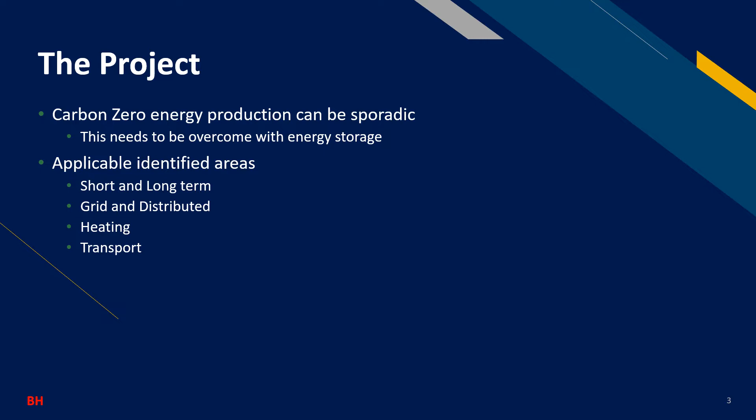In order to break the problem down, we identified key areas where storage can be applied and integrated to meet with the current and future demands of the grid. These areas are the following: short-term for power supplies of typically less than a day, and long-term storage that can supply a lower output over multiple days. These can be implemented at either the grid level or on a more local distributed level, such as a scale as small as per household or up to town and city scale.

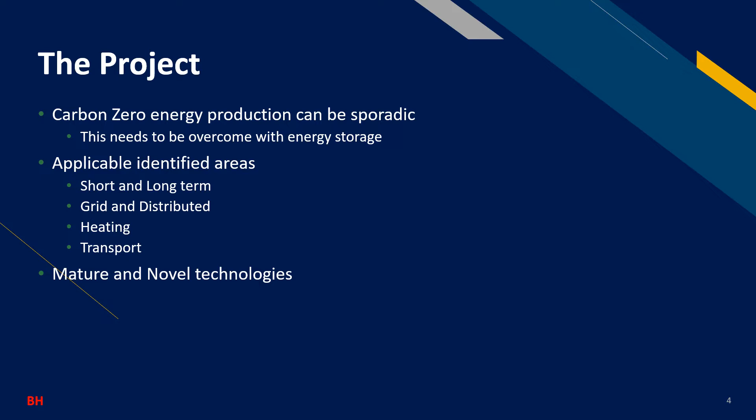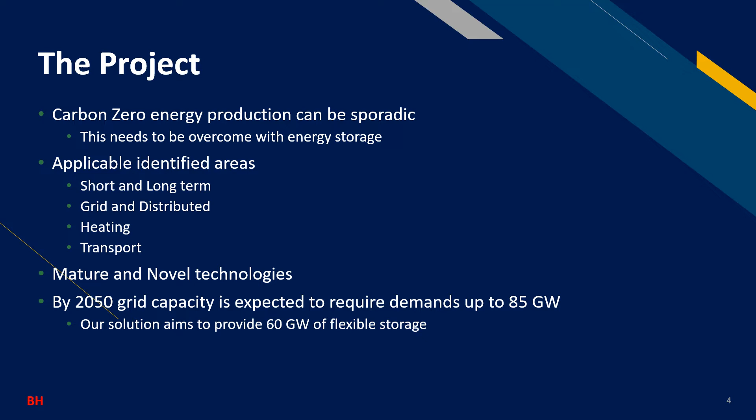Heating is also another area that needs to be looked at due to its potentially high power demands as further electrification is implemented. And finally, the transport sector, where both commercial and personal use vehicles will need to be considered. Each of these areas could have a single technology that provides the best solution, whereas others could have multiple that are applicable. Mature and novel technologies were identified, and then research was started, with a focus on mature solutions that could be commercially viable within the next 5 to 10 year period. Our storage solution is required to work with a potential of 85 gigawatts of demand based on future estimates.

The technologies looked at can be split into two categories. The first, utility, covers the background areas that would dictate our specifications. This includes things such as logistics and sources for both the electrical grid and pipelines for gas distribution.

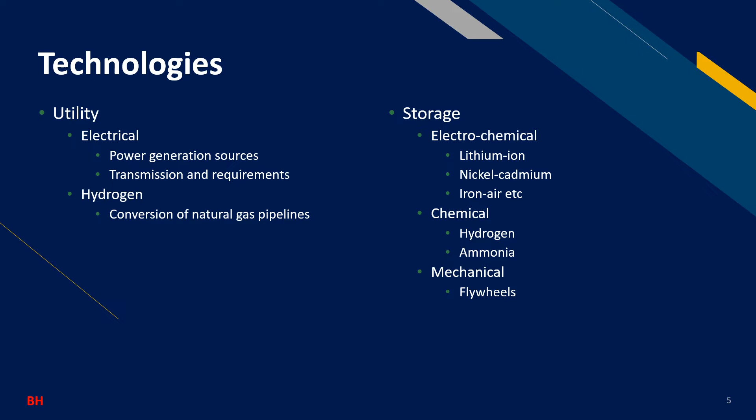The second, storage, was our main focus, and covers the four main methods of storage available to us: electrochemical, for example lithium-ion batteries, nickel-cadmium, and more discussed both later and in our report; chemical, such as hydrogen and ammonia; mechanical methods, such as flywheels to store energy with momentum; and finally, thermal solutions, which store energy as heat to be extracted later, such as molten salt storage. I will now pass over to Aranan for his slides.

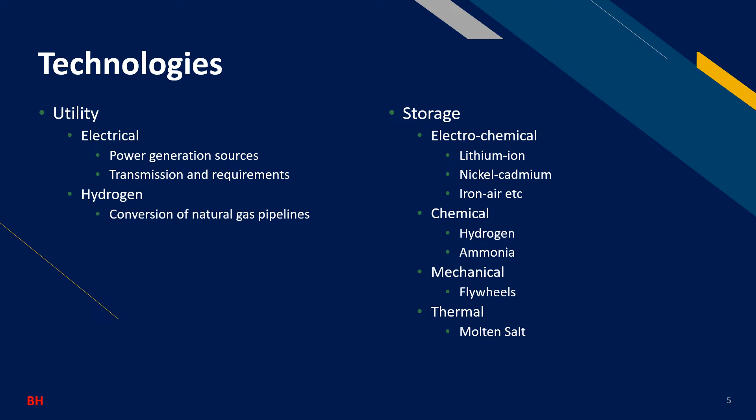In order to reach net zero, energy storage systems are key because they not only store the electricity generated from renewables, but also help integrate the generation into our current national grid. When exploring a solution for the utility scale application, it was important to distinguish the technologies into two different categories that had different requirements. Firstly, the short-term solution looked at technologies that offered a quick response time and a high power output up to a few hours.

This was to provide reserve and response services such as frequency regulation, load leveling, and black start services, as well as transmission and distribution support for the grid. On the other hand, the long-term solution looked at bulk power management and storing a large capacity of energy up to a few days, and so focused on scalability and lifespan.

For our short-term solution, we realized there's a range of technologies suitable to be implemented in utility scale applications, with each having their own advantages. There's no single right choice when choosing a technology, but rather it depends on the factors you prioritize at the time, such as cost, sustainability, and reliability.

At this point in time, lithium-ion batteries pose to be a good solution because they are well established, with over 90% of battery storage systems utilizing the technology already. They offer the fast response and high power output required, as well as having a very high efficiency and a relatively low levelized cost of storage. And so it comes as no surprise there's already 16 gigawatts worth of battery storage projects in the pipeline to be installed in the UK, with most of them using lithium-ion technology.

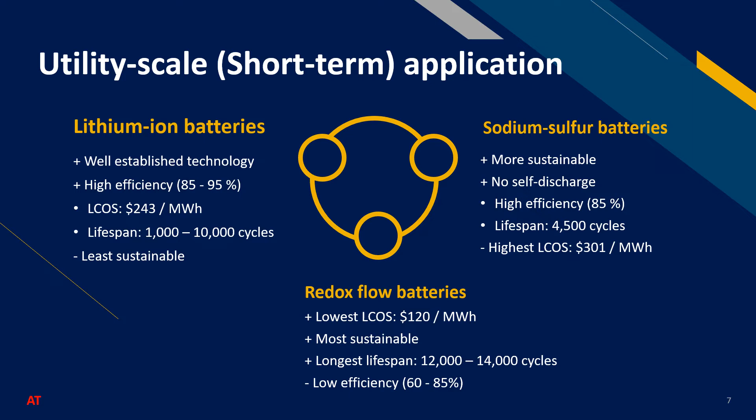Thanks, Aranan. The long-term solution targets a storage length of up to a few days. Various technologies were considered for our final proposal, with some technologies being rejected earlier than others.

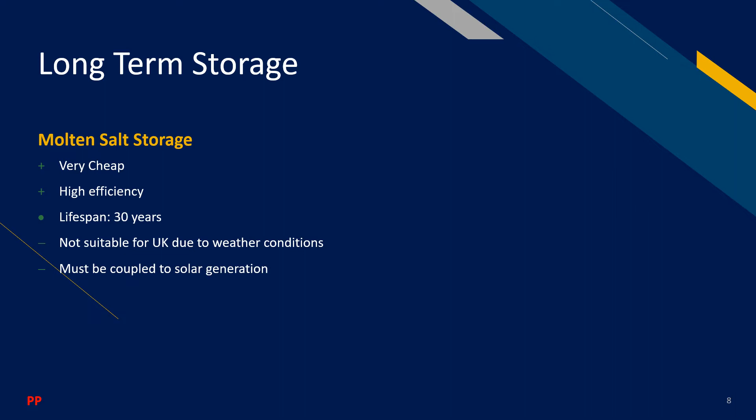Molten salt storage was first to be rejected. Despite its low costs and high efficiency proving attractive, the requirement of plentiful sunlight and warm temperatures make it unsuitable for the UK. Compressed air energy storage was also rejected due to the requirement of specific rock formations required to construct caverns, as well as its very poor efficiency.

The final two options were liquid air energy storage, LAES, and iron air batteries. LAES works using thermodynamic processes to store energy as liquid air before releasing the energy by expanding the liquefied air, which drives a turbine. Iron air batteries operate using reversible rusting, where oxygen reacts with iron via a liquid electrolyte.

In our final solution, LAES was selected as the desired technology. Although both of these technologies have low standalone efficiencies, LAES systems can boost their efficiencies greatly using co-located factories providing waste heat and/or cold, whereas an iron air battery's efficiency is fixed.

LAES is also more flexible with storage length, more space efficient, and has a lower levelized cost of storage. The initial outlay is high, although this is the case for many grid-scale solutions, as the energy storage capacity required is also very high. I will now pass on to Callum, who will present energy for heating and how this impacts our seasonal storage solution.

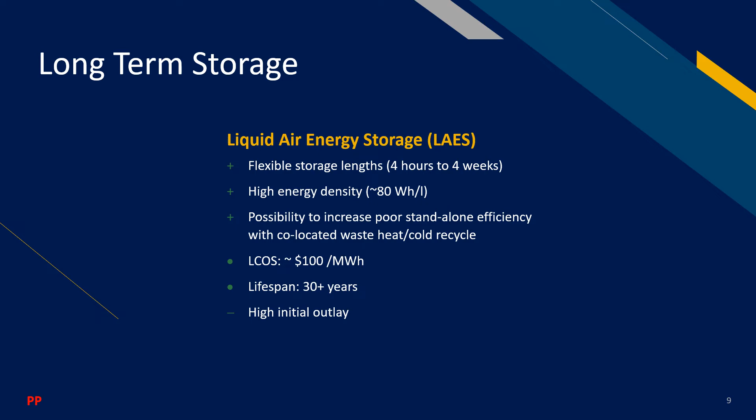We also had to include heating in our considerations. This is because to implement a full road to net zero, heating must be electrified, as it generates 37% of the CO2 emissions within the UK.

Currently, this is because it uses methane boilers. To electrify this, there are two main options that are considered: heat pumps and hydrogen boilers. Heat pumps are more expensive, however, have a much higher efficiency compared to hydrogen boilers. Hydrogen boilers, on the other hand, can be installed on the same principle as methane boilers, but require 3 to 5 times as much energy for the same efficiency.

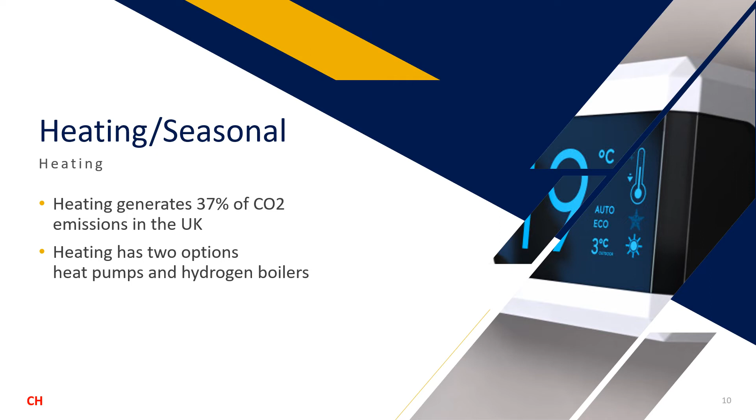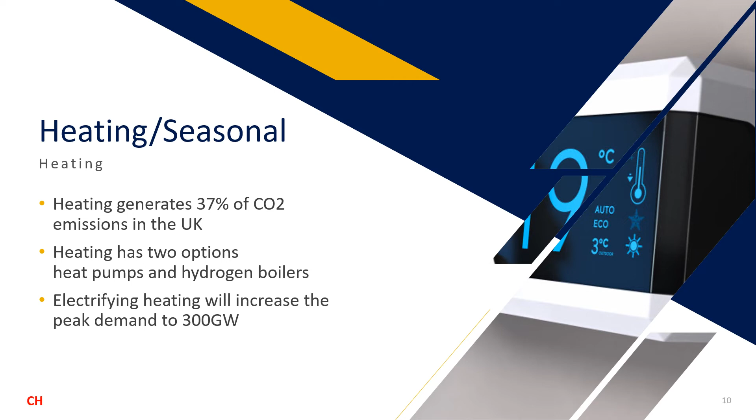By electrifying heating, however, this will increase the peak demand to 300 gigawatts, 5 times greater than what it would be if it was just electricity. It also introduces significant seasonal variation.

As mentioned previously, introducing electrified heating will increase seasonal variation, meaning that seasonal storage is necessary. There are only two options: pumped hydropower or storing chemically, such as hydrogen. Pumped hydropower is not viable for geographical reasons, so hydrogen storage is needed.

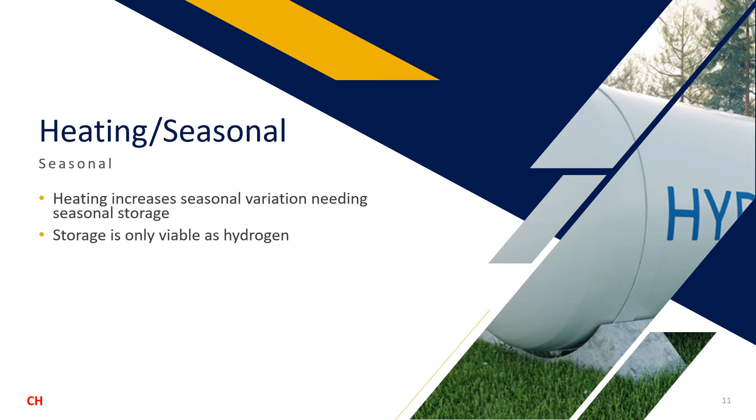There are 5 main types of hydrogen storage: adsorption, storing it onto an element; cryogenic hydrogen, cooling it down to negative 253 degrees Celsius; metal hydrides, reacting it with a metal to form a metal hydride; chemical hydrides, converting it to another form that contains hydrogen such as ammonia or methanol; or pressurized, which is stored in large salt caverns.

The only viable option of these is storing it into caverns currently, as the others are either too infant or possess significant disadvantages, such as the poor efficiencies of cryogenic hydrogen.

Of these options, the most optimal one is chemical hydrides. However, owing to their toxicity and infancy, they cannot be considered.

Pressurized hydrogen means that the possible better solution for heating would be to implement hydrogen boilers. However, this is strongly dependent on how technology varies. Given that it wasn't the focus of this research, it hasn't been fully looked at.

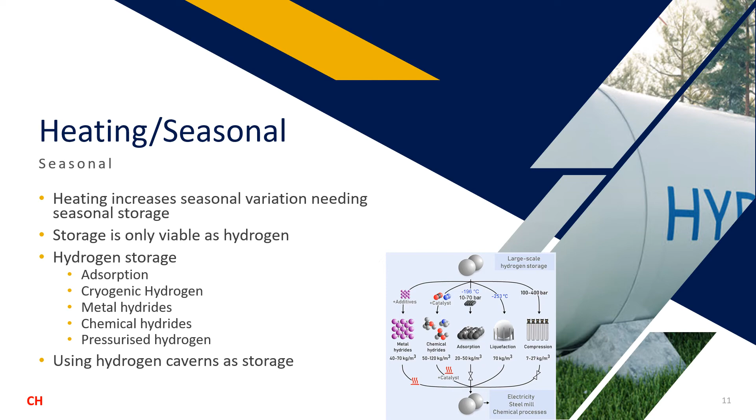In the UK, fossil fuel vehicles currently make up 90% of road traffic and contribute to 25% of the UK's carbon emissions. On the road to net zero, the UK is aiming to make the change to zero-emission vehicles. Using renewable green energy sources, new storage technologies in recent years allow for new electric and hydrogen vehicles to replace the existing internal combustion engine vehicles.

Battery electric vehicles, BEVs, use batteries to store chemical energy. These are a well-established technology with high energy efficiency. A range of battery chemistries exist, but lithium-ion stands out, with numerous manufacturers using this battery chemistry in their BEVs. There is lots of supporting infrastructure in the form of BEV recharge stations on main roads and in towns in the UK.

The main concern that the UK may face in the future when we all use electric cars is the strain it may cause on the grid, particularly at peak energy demand times. Large trickle-charged batteries can be implemented at recharge stations to reduce this strain on the grid, which can charge multiple electric vehicles with high-powered chargers and then recharge from the grid during low energy demand times. The lack of restrictions of both space and temperature allows for battery technologies such as liquid metal to be utilised for this application.

Another supporting technology for zero-emission vehicles are hydrogen fuel cell electric vehicles. Hydrogen reacts with the atmosphere's oxygen in a reverse electrolysis process, producing only water as a byproduct. This technology is known for vehicles that have a much larger range of travel and are just as quick to refill as fossil fuel vehicles.

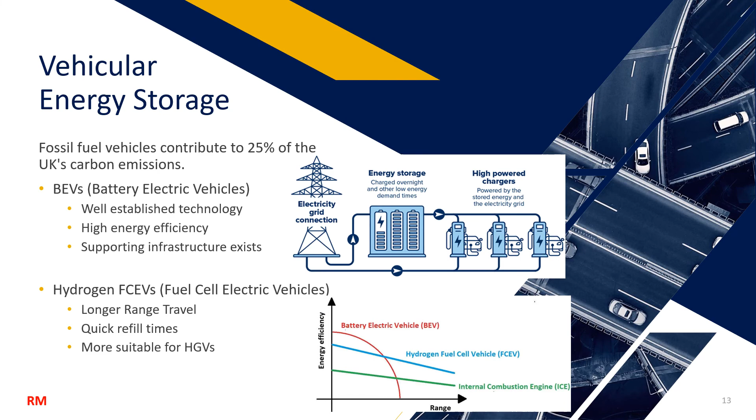The way that all the systems mentioned previously link together is as follows. It starts from the vehicle level. Electric vehicles will charge from local storage and generation. If they are depleted or do not meet demand, they will switch to the grid and utility scale storage.

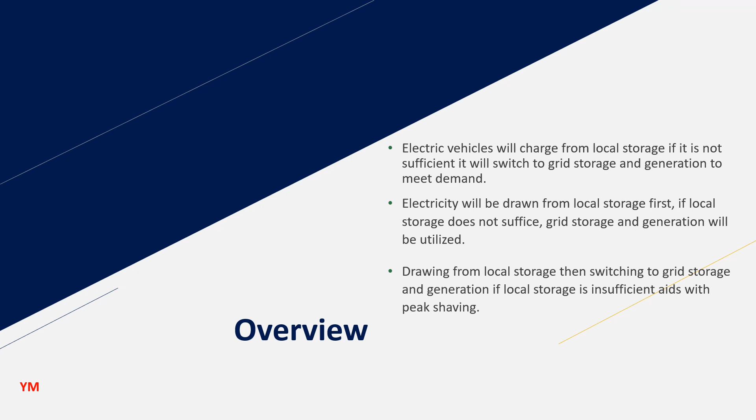The first source of electricity will be local storage to reduce the strain on the grid and utility scale storage. If local storage is insufficient to meet demand, the system managing the flow of electricity will switch to utility storage and generation to meet demand. The prioritization of local storage with the ability to switch to grid storage and generation if local supply is insufficient aids with peak shaving, reducing the number of peaks created in a day cycle.

The postponement of non-essential tasks, such as charging electric vehicles, to a time of low energy demand aids the consumer by reducing the price paid for the electricity used to charge their vehicle. This also helps decrease the demand on the grid by shifting non-essential draw to off-peak hours, decreasing the load on the grid during peak hours and helping make demand on the grid more uniform throughout the day.

The short-term storage solutions will be drawing from the long-term storage applications to remain topped up at all times. This ensures that frequency regulation and load leveling are possible at any time, while the longer-term applications will focus on bulk power management and blackout emergency reserve power.